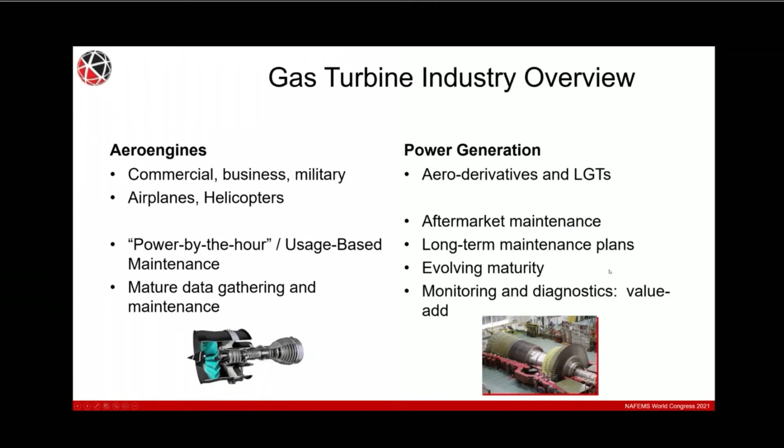So if we focus more on the power generation market, we uncover a few interesting challenges. So first of all, the data scientists who are tasked with developing predictive models, they need a tool to gather and track data coming from both simulation sources and real world sources. The operations engineers need to know when it's safe to restart a turbine engine, or at what cost to the remaining useful life further utilization of that engine will have.

When I say remaining useful life, that refers to the number of cycles that a specific part or maybe the entire engine can endure before maintenance or overhaul is required. And low cycle fatigue like creep or high cycle fatigue like rotational dynamics and vibration can contribute to this. And then there are the service engineers who just need to know the optimal time to perform those repairs.

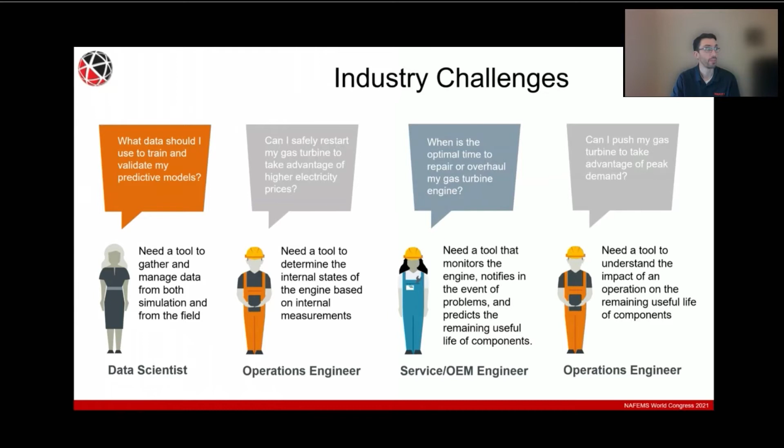So what this all boils down to is the need to, first of all, federate data, monitor data, and augment the data. So the technology bricks that are needed to address these issues and challenges are as follows. First of all, you need a pipeline to capture and serve up the data to the other technology bricks in the stack here. Then you have thermomechanical simulation and test data correlation, which allows you to prepare a model that is going to confidently predict the transient engine behavior in reality. So that's our digital twin, basically.

Then we have reduction techniques that produce models that can run more quickly and that can act as virtual sensors for the prediction of engine states that aren't necessarily that easy to measure. And then we have the cleansing of real-world engine telemetry data prior to sending it off to those virtual sensors, dashboards, alarms, and other pattern recognition or machine learning algorithms.

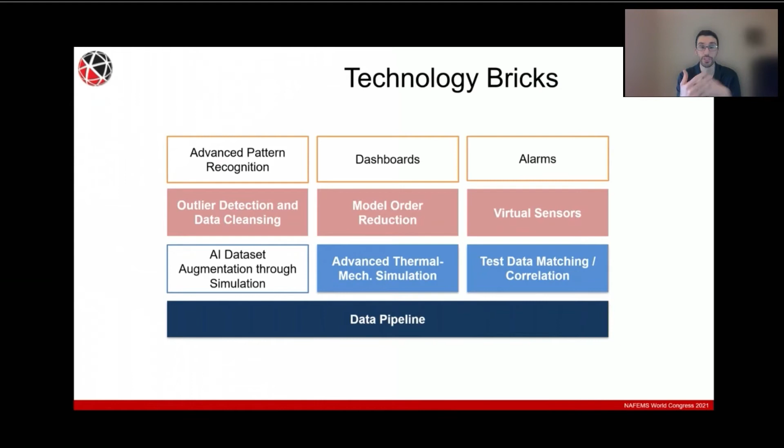If we look at it a different way, from the point of view of the data and process flow, the data pipeline in the middle consumes both the test and in-service data. But this data can be noisy and contain certain errors like sensor failures, so the detection of outliers and cleansing failures is necessary before serving up those data to inline virtual sensors, correlation activities, dashboards, or even predictive maintenance algorithms.

And then those virtual sensors are derived from the reduced order models of the detailed thermomechanical model. So now I'll just jump into some more of the technical details.

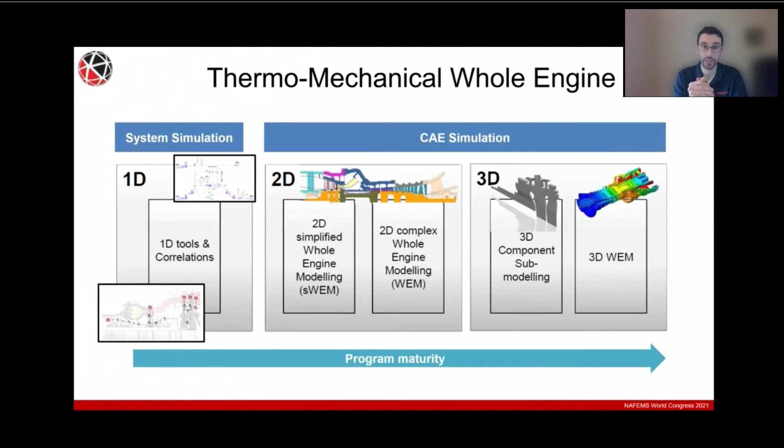When it comes to modeling a gas turbine engine, there are different levels of fidelity depending on the maturity of the program. You can have your system simulation all in 1D or model-based systems engineering. You can have 2D simplified whole engine models. Then you have full 2D complex whole engine models where you're simulating both the thermal and the mechanical behavior. Then you can have 3D component submodeling to get more detailed behavior still. And then on the high end, you have full 3D whole engine model simulations.

These whole engine models are very complex and can include hundreds, if not thousands, of thermal boundary conditions. And so, though it's possible to include computational fluid dynamics, it is most common to represent gas and air flows in the engine using these advective streams and voids, where the temperature and mass flows are coming from upstream thermodynamic calculations. The engine is commonly modeled using a combination of 2D axisymmetric and 3D meshes.

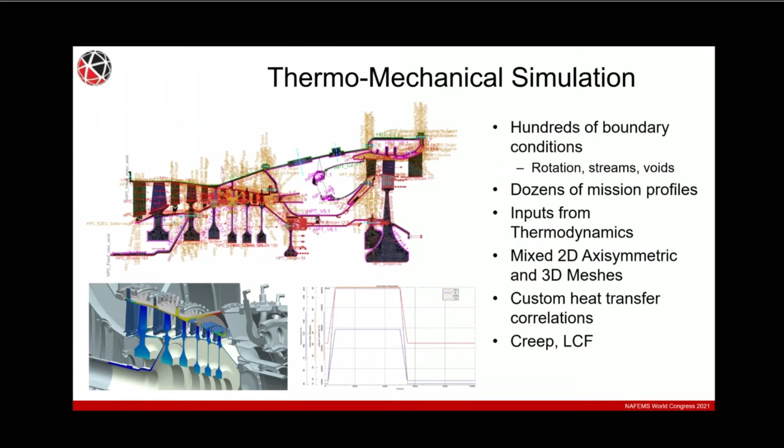Now, these complex thermomechanical engine models need to be correlated to test data. Our clients have reported that doing so by hand is an extremely lengthy and tedious endeavor. So we set out to develop a more automated method that searches the design space to minimize the difference between test and simulation telemetries. The key challenges are just the sheer number of design variables, as well as the fact that we're trying to correlate transient profiles, as well as doing so with a nonlinear model.

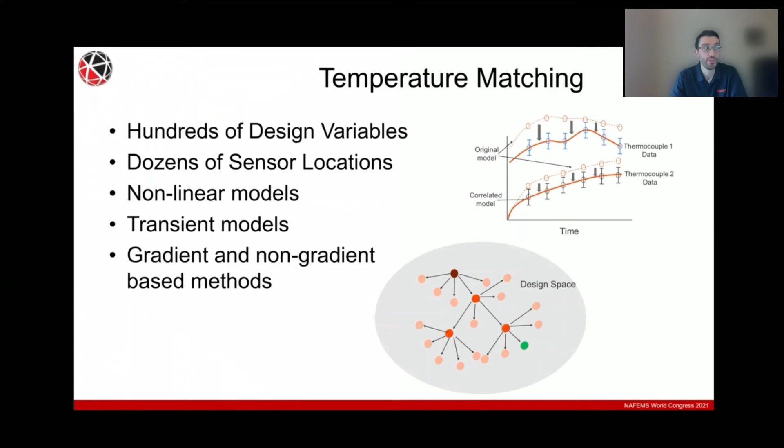Traditional perturbation methods to compute the sensitivity to design variables are way too expensive because you have to do it one by one. And so we've implemented an approach using the adjoint equations. With this approach, every optimization cycle involves 2 transient runs as opposed to 1 for each design variable. In the forward solution, we obtain the temperature field at each time step and then define the objective function, which is to minimize the error between the simulation and the test data.

And then in the backward solution of the adjoint system, the gradients are computed and the design variables are updated. It's a bookkeeping exercise to keep track of all the gradients, and the optimization scheme chooses the largest step to take along the gradient direction within that design space. Our tests so far have shown upwards of a 12 times speed up when using the optimization scheme over constant step size. And this scheme is general. It's not only applicable to gas turbines, but can be applied to general transient thermal models as well.

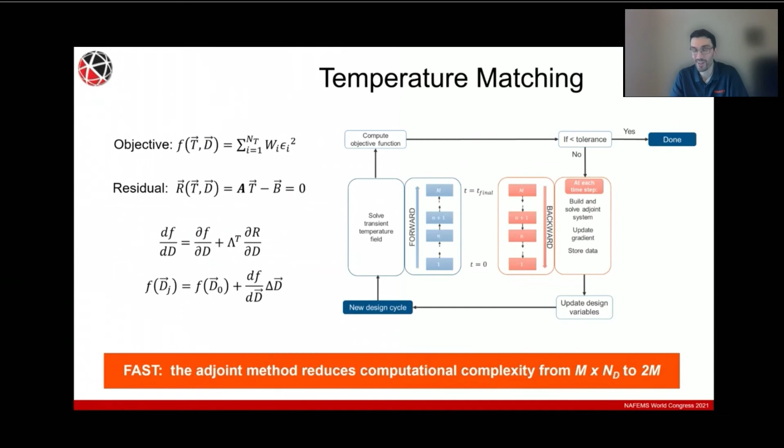Hey, Chris, you have 1 minute left. Do you want me to move to a specific slide? Oh, I have 1 minute left. We burnt so much with the technical issues. Well, we can zoom ahead to slide 13 and 14 if that's okay.

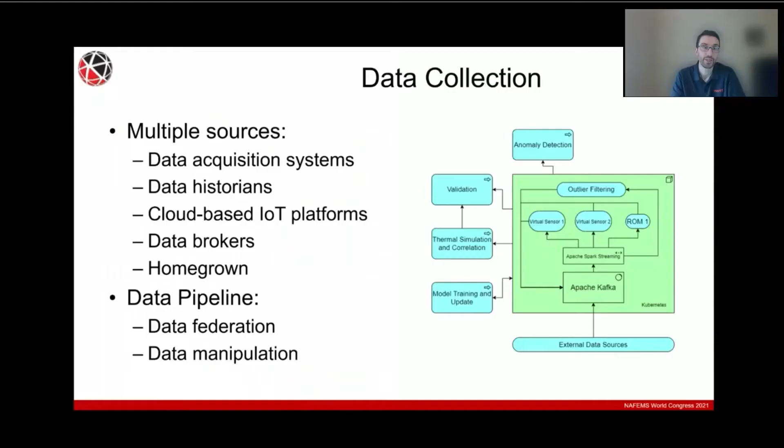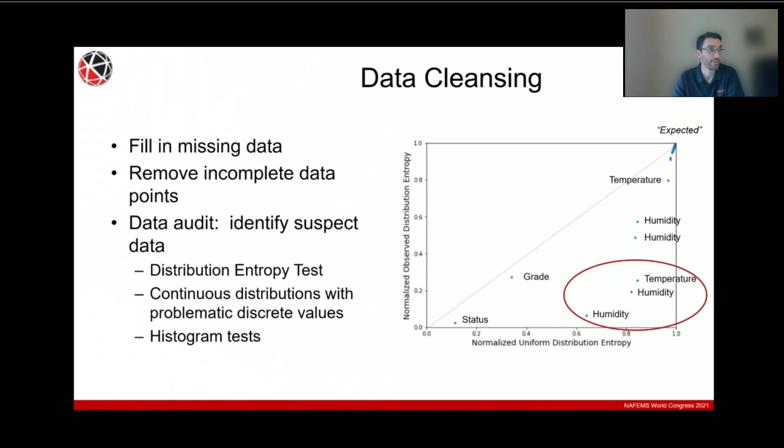We've also developed and researched outlier detection methods. It's basically an unsupervised machine learning algorithm that detects outliers in high dimensional telemetry data. So we can use a distance function from the statistical mean to see if there are any data points that are abnormal. And then we can define rules to automatically cleanse those.

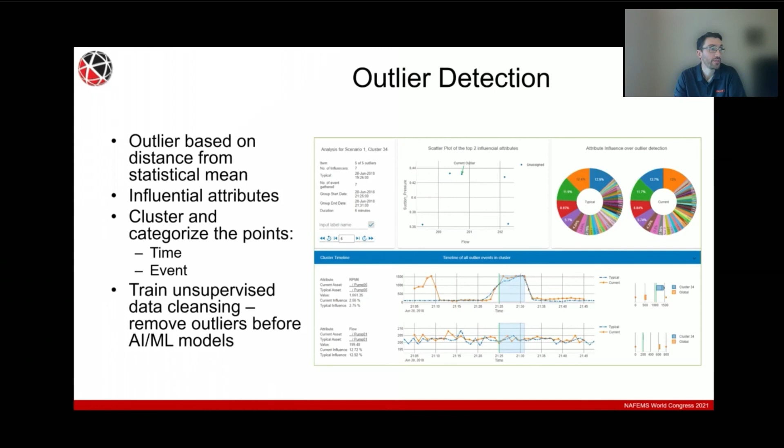If we're running out of time, I just want to mention that we can use model order reduction as well. We've been doing intrusive methods to extract system matrices and project those onto a reduced order basis so that we can build reduced order models that will serve as virtual sensors. And those can be deployed either on the cloud, on the edge, or basically in line with our data pipeline so that you can start to develop predictive maintenance algorithms to help with the maintenance of these turbomachinery engines.

So unfortunately, I ran out of time. It was the technical issues that we had sharing my screen.

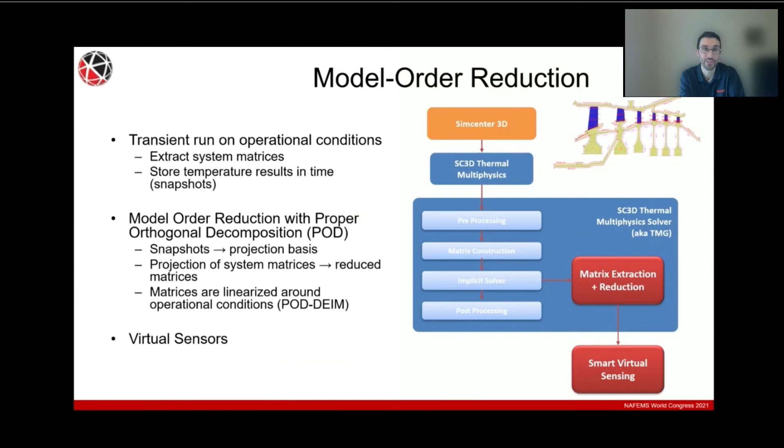But if you just go ahead to the concluding slide, what I wanted to show today was that simulation and AI are pervasive tools. We can augment AI data sets with CAE, but we need reliable data flow strategies so that we can feed our reduced order models and virtual sensors. And this enables new business models, energy as a service, or long-term maintenance plans.